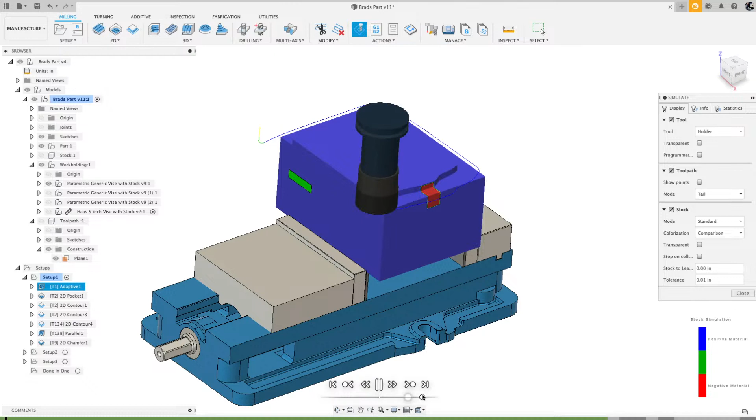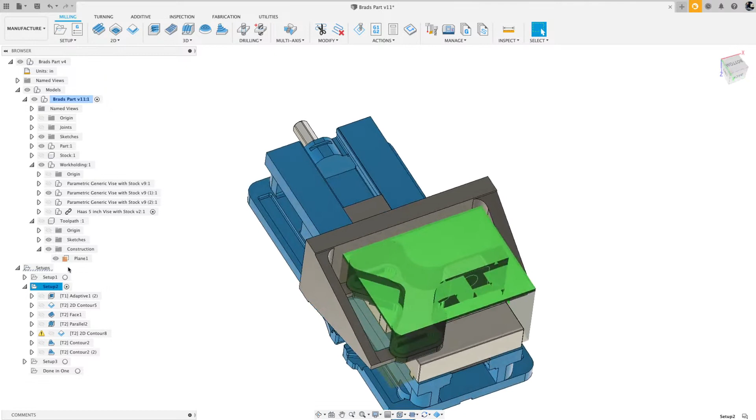Let me just run it. If you guys remember this, actually I should probably just zip right through that. So that was the first operation. And then we flipped it over. That was operation 1. And then operation 2. Let me come here. Let me hide. Whoops. So then operation 2. Let's see. We got this guy here. Okay. So operation 2, we flipped it over. And let me simulate this guy. Something's wrong with my visibility of things, but then we machined it here.

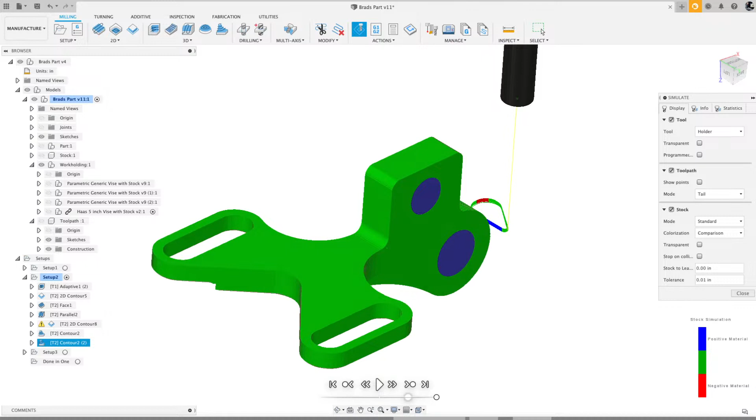Awesome, everybody. Okay, so then we machined this, and then we came to the side, and we put those holes in with a couple of bores. And so that's where we ended up. And so that was 3 operations. And now, let me turn this guy on here. Let me hide that.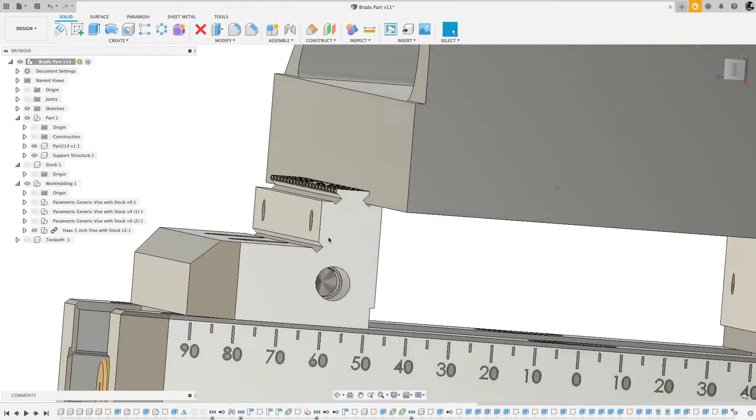I'm holding on just here at the bottom, generally about 3 millimeters or 100 thousandths of an inch. I start with my stock. I have a parametric vise set up here with the stock in it, and if I hide the support structure, you can see the stock I'm intending to use for this part.

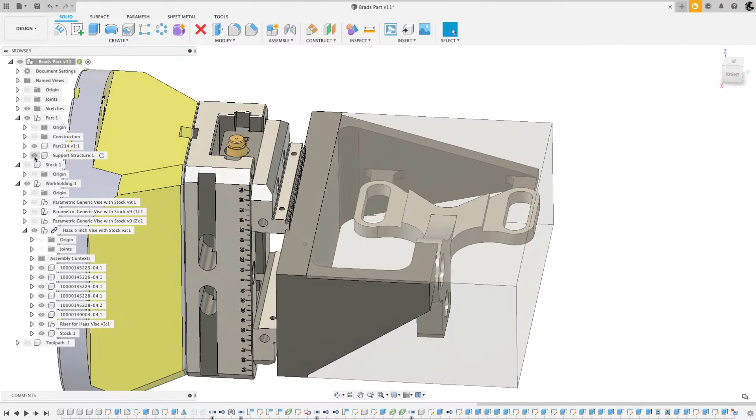If I started to machine this part, I would have to be mindful of how I'm going to hold it. This is merely a suggestion, not the only way to do it. Some of you might think you'd flip it 90 degrees so the part is sticking up this way, but from experience, I just like to do things like this.

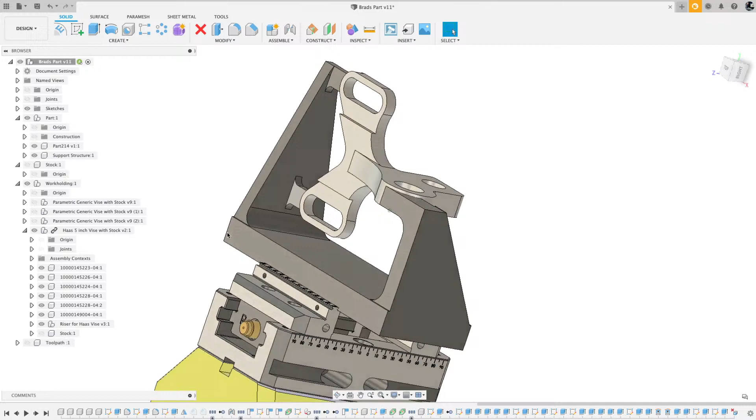It's being supported in 3 points. Let me hide that stock. Because it's supported in 3 areas, and this support here is a little bit offset, the part will have a lot of rigidity. Then what I would do is just start machining this.

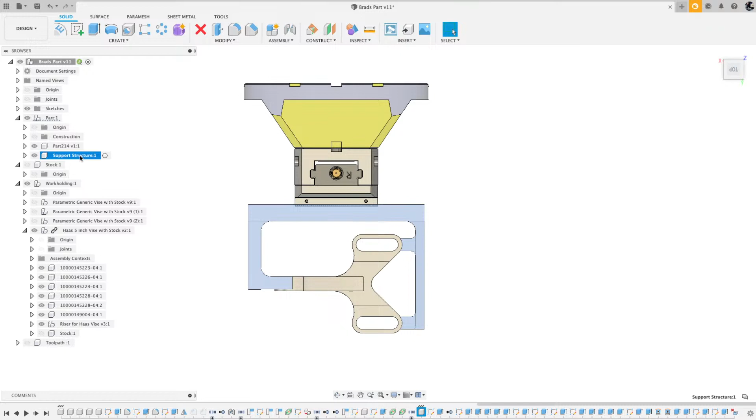I want to talk about some of the things a machinist would need to do. As I'm looking at machining this part, I'm thinking about where my toolpath is going to go and what boundaries, if any, I need to create, like sketches. If I look at it from the top view, rotate it, and imagine it sitting in my machine looking top down, I'm going to want to machine all of this area. I don't want to violate the support structure here, and obviously I don't want to violate the model.

So I will definitely set those up in my setup. But even before I get to that, I need to do a couple of things, and I have a bucket -- I call these buckets -- where I keep some things for my toolpath.

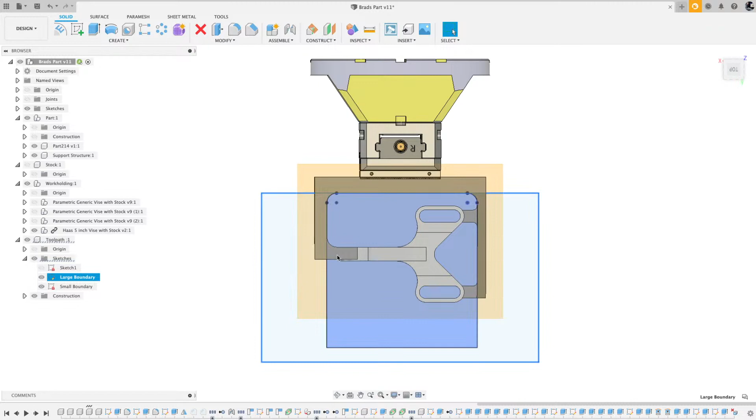I create some sketches, like this large boundary I created, so that when I do my roughing, whether it's adaptive or pocket clearing or something like that, I tell the tool to stay inside that large boundary, the blue area here. It will machine everything within the boundary but will not violate any of the model.

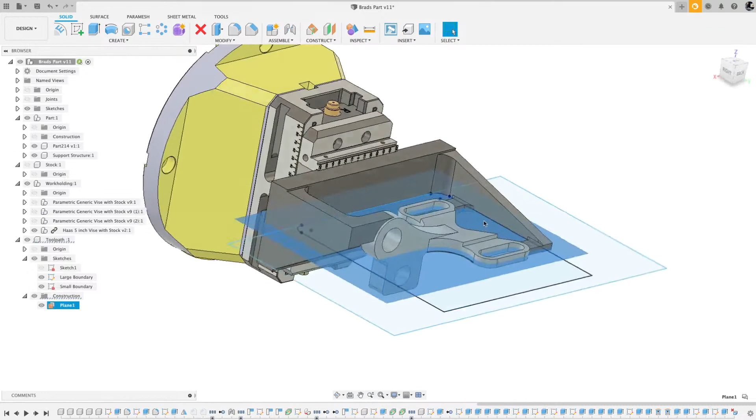The other thing I do is, in that same component, I created this plane. The reason is it's right on the center of rotation, so when I select my heights for my cutting depth, I'll select that plane and tell it to go below that by about 1 millimeter, in metric.

Maybe about 50 thousandths, sometimes even 100 thousandths to 3 millimeters below that. So when I'm machining in this orientation and the tool is coming from top down, if the tool is in line with this axis, the tool will go below that. I could even select it as a Z depth to go down to this face.

Again, I'm just talking through things as a machinist. When I'm doing a project like this, how am I going to hold it? What machine am I going to do it on? What material do I have on the shelf? What's the material of the part? What's the quantity? What's the tolerances? And when is the part needed?

If it's one part and they need it yesterday, I'll grab whatever size material, throw it on the machine like I showed in that example, and start roughing and machining it. If I'm making 100 of these parts, and it'd be impossible to make it same day or next day depending on cycle time, then I'd probably invest some time into building some fixturing.

So I don't have to start with such a large piece of material, because when you start with such a large piece, you have to machine all of that material away. That's cycle time, and it also costs money for a large piece that might be twice as big as necessary. If you're making one part and wasting $20 or $50 on a $500 part, who really cares? But if you're making 100, 500, or 1,000 parts at $20 more per part, you can quickly see the math dictates the direction you want to go.

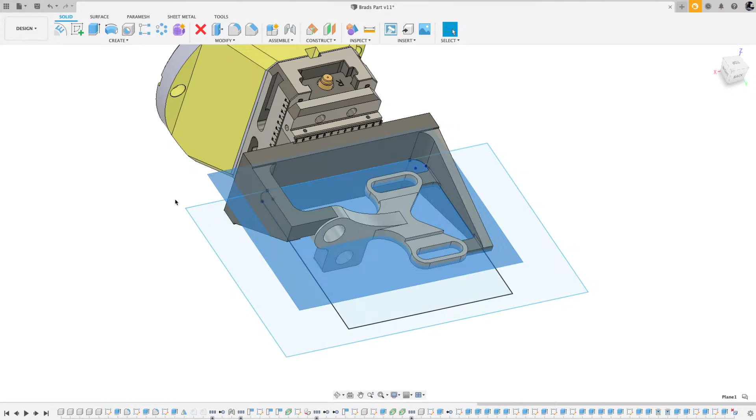Those are the things I focus on as a machinist doing a part like this. But again, I'm thinking this part's needed immediately and it's only one part, so I don't want to build any fixturing. I'll take a block of material that's a little bit larger, and let's turn that stock back on.

And I had that stock as part of my parametric setup. That's why it's in this work holding bucket. Otherwise, I would have it up into here.

But yeah, so those are just some of the things that I talk about.

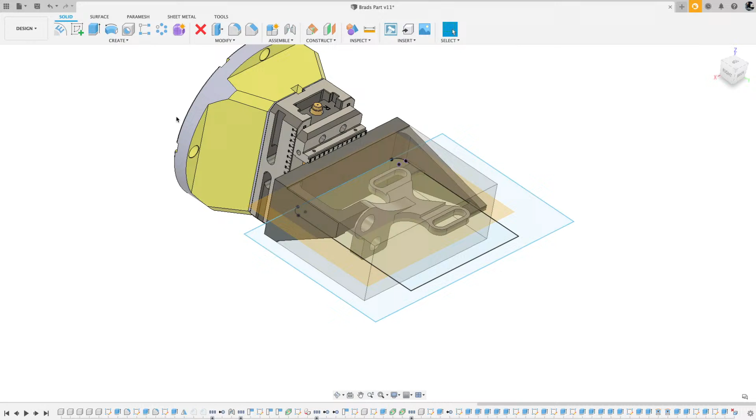Okay, getting back to this part. So now that I've talked through this and I have my stock, I'm just going to hide the toolpath bucket. I don't need that visibility on. And there's my solid model of the stock, and then again, that support structure.

When I machine this and remove all the material, I will have the support structure as part of my model that I'm machining, and also the part. So I don't want to violate the part or the support structure.

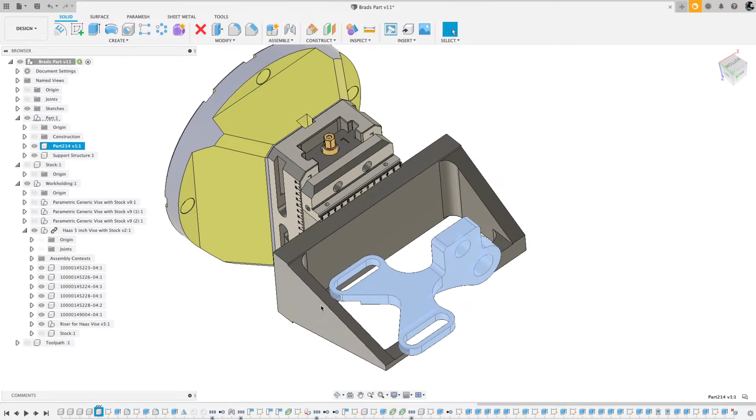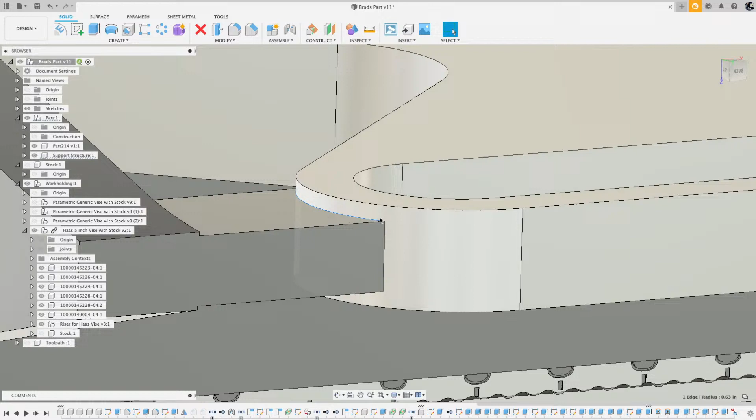And then for the very final operation, what I will do is use a 2D contour. I'm stepping ahead, but I would machine everything, and I would use this edge here and just do a 2D contour along that edge and step down very small. Depending on the structure or size of the part, I'll step down 20 thousandths, maybe 10, sometimes 50, sometimes even 100 thousandths, which is about 3 millimeters or so.

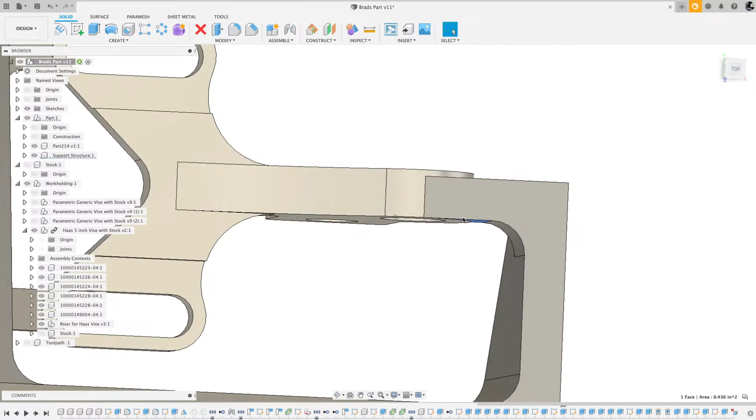And then I would leave a little web of about 10 thousandths of an inch and then break it off. I'd have a really thin tab here, a really thin tab there. And the same thing, I'd be able to rotate it this way and drive my tool on this edge and come down just shy of this face, again leaving maybe about 10 thousandths of material. So when it's done, if I have 10 thousandths of support here and here and here, you'll be surprised at how strong and rigid that is.

But I would definitely machine everything first with these tabs intact. Also, another thing I'm thinking about as I'm talking about this part - if this part was taller and came out further this way, I would leave all of this area solid. Like let's say where this stock is, I'd leave all of this area solid if it was sticking out this way, and do as much machining on the end, and do the finishing of that part as well.

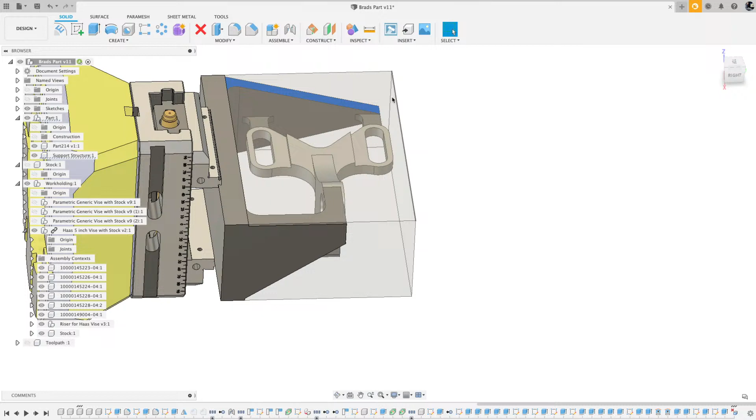No different. Let me grab a pen. No different than if I was doing a lathe part and I'm supporting that part in a chuck, and I've got that part sticking out.

Actually, do I have any finished parts? Here's a part I did. And then you're holding that in a chuck, and the part is sticking out. Depending on how far it's sticking out, you want to finish on the end of the part with as much material in this area solid so that it's rigid when you're machining this, and then you work your way back.

And I remember on that spark plug bottle opener that I did a while back with Brad, Brad did a live stream on the design of it, and then I programmed it, then we machined it at Pier 9 in San Francisco. So same process. So sometimes people look at a part like what I have on the screen and say, oh, that part's sticking way out, it's going to chatter. You'll be surprised how strong and rigid that is.

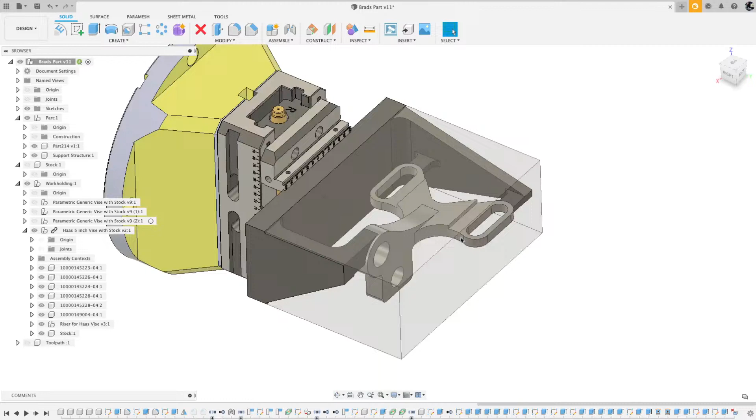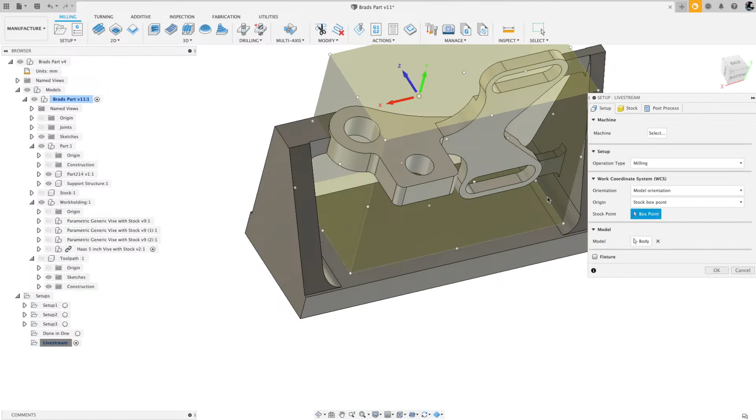So let's switch my screen. So again, those are the things that I think of as a machinist when I'm machining a part like this. So what I would do is I would create my setup, and let's dive into that. Let's go to manufacture. All right. So this setup 5 is what I just created quickly when I wanted to see the stock size. But I can just continue on that. Let me change the name to LiveStream, and I will just talk through some things that I need to set up properly to get this type of operation to work.

Obviously, I need my model. I can select my model here, so if I deselect this, I could select the model right there. If I cancel that out, I could also just grab the part here. So I can navigate into here. I could grab that body. I could deselect it. If I grab this, that will also work depending on what's under this. So be mindful of that. You can also create components.

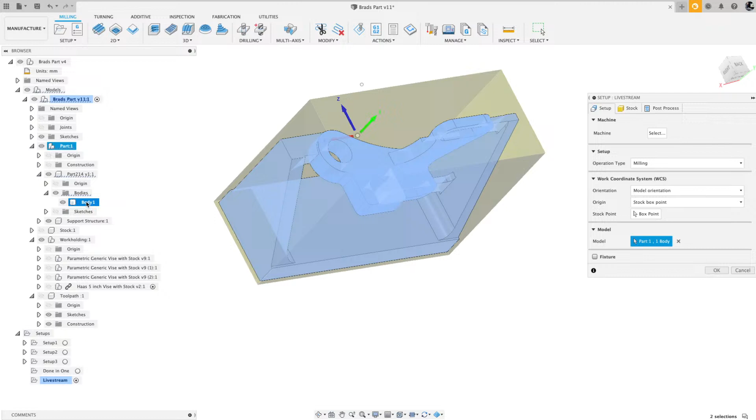So let's say, what if I grab this whole component? So it will grab everything that's under this component, which is the part that Brad created. It was part 214, and it's that body. It's kind of hard to tell, but it's that. And then also the support structure. So be mindful of when you're creating your components and bringing things in, how you set it up. It can make your life a whole lot easier. So again, if I deselect it, I can just come right here, and that's the part that I'm machining.

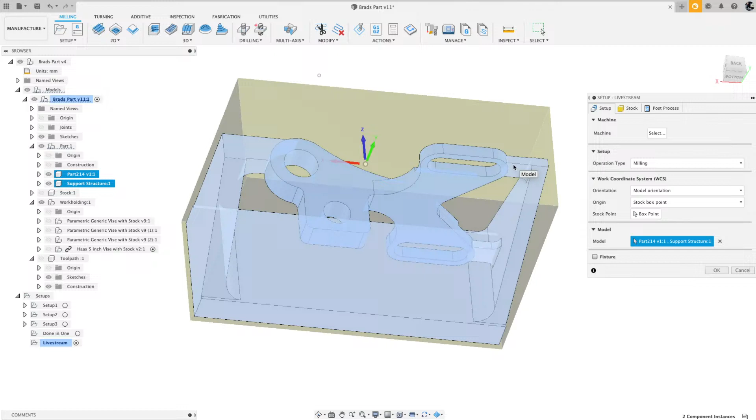The other thing you could do is, if you have these separated, let's collapse that so it's not as busy. If you're doing some 3D strategies, and let's say I wanted to cut those tabs, and if I had this support structure as part of the setup, and I was doing a 3D strategy, it would think that the tool is violating that model. So just be mindful of that when you're creating your setup. I can leave it like this here for now.

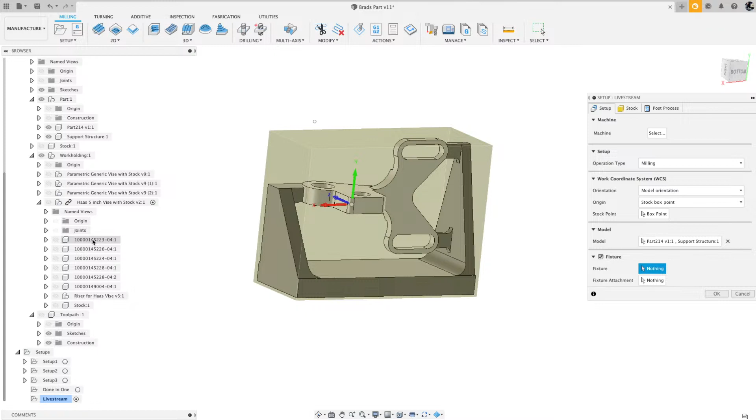I could also assign the fixture that I'm going to do. And I remember that's going to be here. And I should probably do a little more homework, maybe combine all of these. But I've got a riser, the Haas riser for that 5-inch vise. And then these are all the parts that make up that. The reason why I'm not selecting the whole component is because I have that parametric stock in there. And if it picks that stock, it won't machine it because it's going to think that that stock is part of the model that I'm machining. And we don't want to violate that.

Or it would think, did I say that right? Anyway, you guys know what I mean. All right, so coming back.

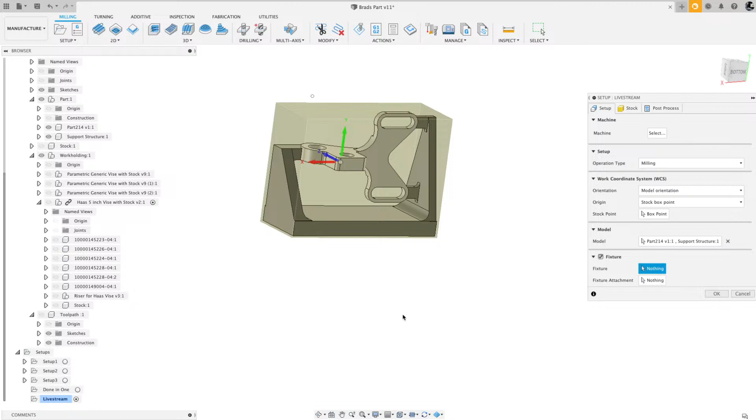On my fixture, I'm going to grab these guys here. I'm not going to worry about fixture attachment because that's already selected. Now, under stock, instead of relative size box, I can grab the stock from a solid, and I know that I created that stock already here. So now, the stock that I'm machining is coming from that solid. And that solid came from here. I suppose I could show you what I did there. Let me bounce over to that really quick.

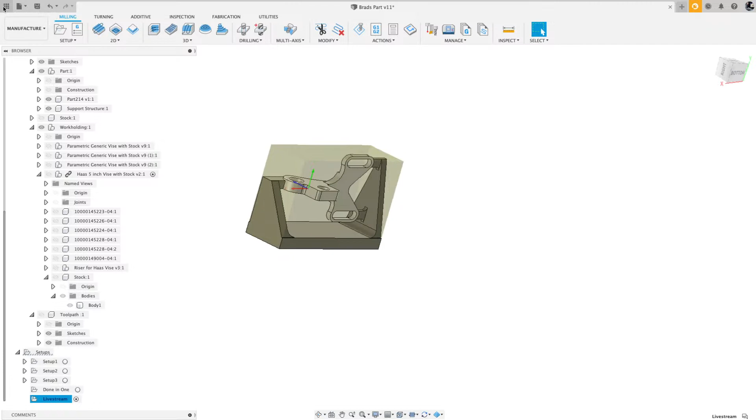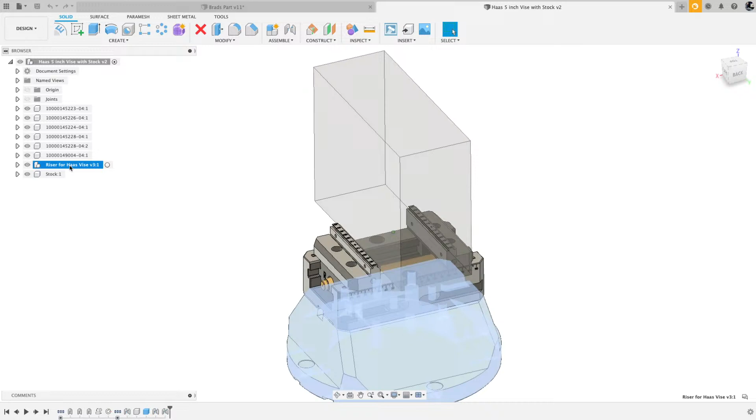Come to LiveStream 13. What I did is I created this. Let me open it. Give that a second to open up. And in this, here's all the parts that make this guy up. That's straight from the Haas website. I downloaded their model, and I just made this assembly. And I also created the stock. And that's just a body. I used a primitive box.

And what I also did is, I'm a machinist, I like to be a nerd. And maybe I'll share this with you guys in the comments when the live stream is done. I created some user parameters to change the dimensions in X, Y, and Z of this stock. So pay attention to the size of this stock.

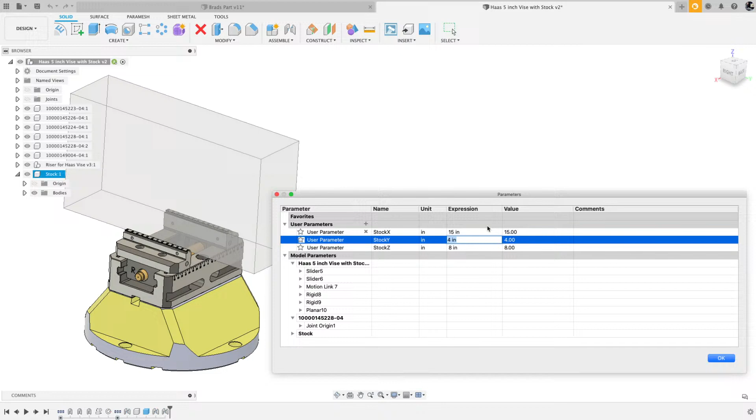So currently that stock X is 10.5 inches. What if I make that 15 inches and I hit tab? It changes the size of that. Let me move this out of the way a little bit here. Can I make this window smaller? Let's do that. And now my Y dimension, that's this guy, 4 inches. What if that's 2 inches? And I hit tab. It updates and the jaws are moving.

And then the stock Z, that's going to be the height in Z. What if this is 2 inches? Now we've got my stock there. Again, I can just come back here and let's make that 5 inches. And you can see how valuable and how powerful this is once you do this upfront work and create these joints and motion links and things like that. I'll go ahead and I'll share this with you guys.

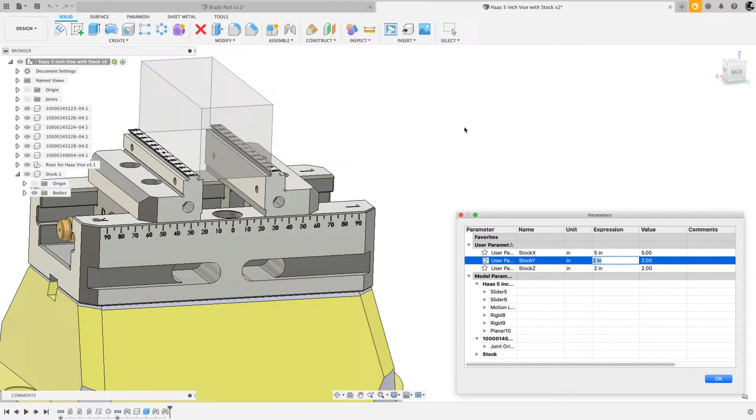All right, Monda, fellow nerd here. Marko wants me to start doing live streams in Croatian. Awesome. Hey, that's a good idea. Maybe Marko can join me. That'd be cool.

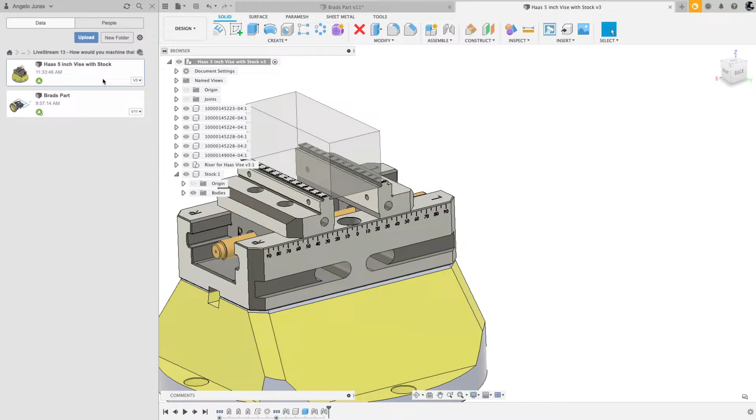So what I'll do is if you have something in Fusion, you could right mouse click and say share public link. I'm not a fan of that word because if you're working on a private design, you don't want that to go out to everybody. I would just prefer that says share document or something like that. But so what you do, you click on this. Did I not click it? Share public link. There it is. This dialog box pops up. And then what you do, you come here to say share the latest version with anyone using.

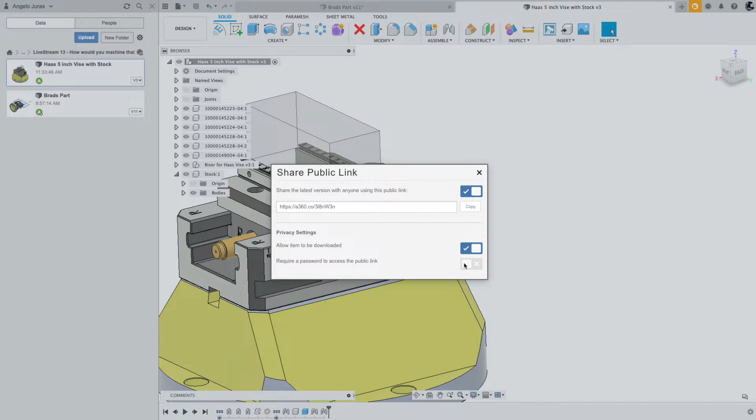And it creates this URL here. Also be mindful of this. Allow item to be downloaded. Turn that on. And you could also put in a password here. I don't care about this being password protected. So I'm just going to copy this guy. And I'm going to drop it into the chat. Let's see. Does that work? It looks like it did work.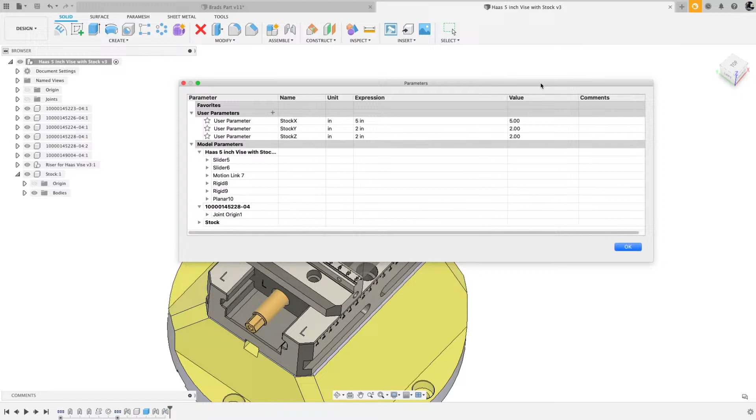And again, to get to those user parameters where you change the size, you simply make sure you're in the design workspace, come to modify, and go to change parameters. And then this box pops up. And you can create your own user parameters. So this, sometimes collapsed like that, right? So you go to user parameters, you can create a new one.

And you can say, let's say I want to put a chamfer or some hole feature in there. I can say chamfer size. And then you put a size here, like say 0.25, a quarter of an inch. And you can put a comment. So then I have that here. And then if I wanted to do, not that I would really do this, but if I had a chamfer there, I can come into here and say chamfer size.

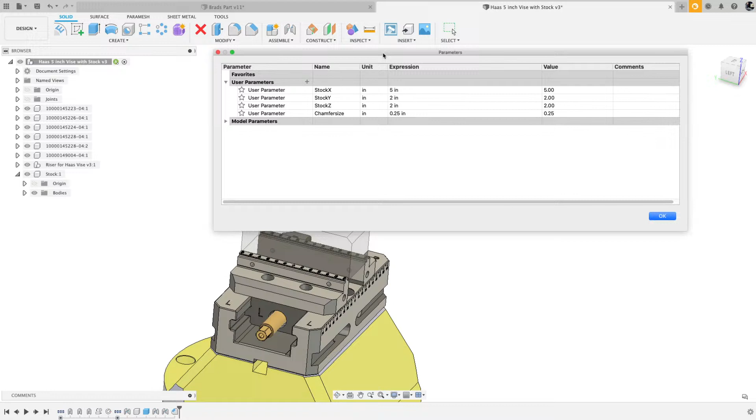Not that you would do that, but to see the power of this, again, you could really nerd out. I can make this 1 inch. See how that chamfer updated? Super powerful, super cool. I use it all the time. You can use it for your jaw width. I've done it before, the size of my parallels. I believe I shared that in a previous live stream. So take a look at that. If not, just leave a comment and we'll get that to you. Okay?

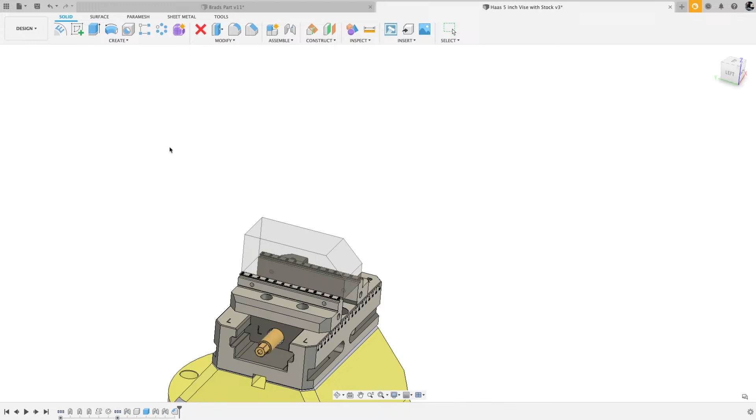All right. So let me close this without a save. I don't want that chamfer to be in there. Okay. Because I've done some work and this vise is linked to, so this is the document I'm currently in, Brad's part. I'm currently there. But I dropped this into this assembly, so that's why I'm getting that yellow update. It says a component is out of date. If I click this,

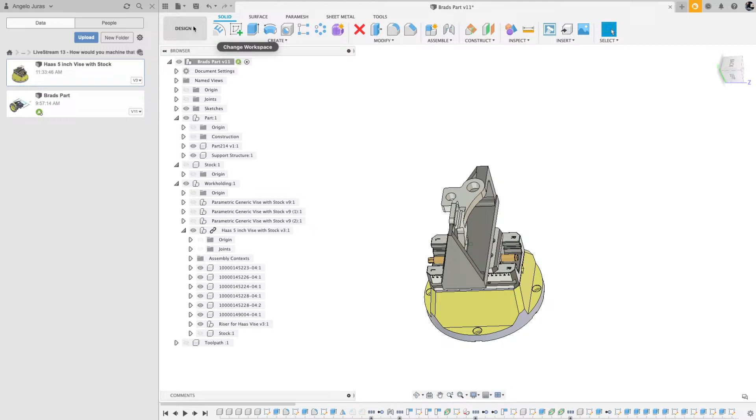it'll update it. And typically what I'll do is I'll go to design, and then I'll update it here. And I broke something. No, it's good. There it goes. Yeah, so make sure you're in design when you do that. All right. Coming back to manufacturing workspace.

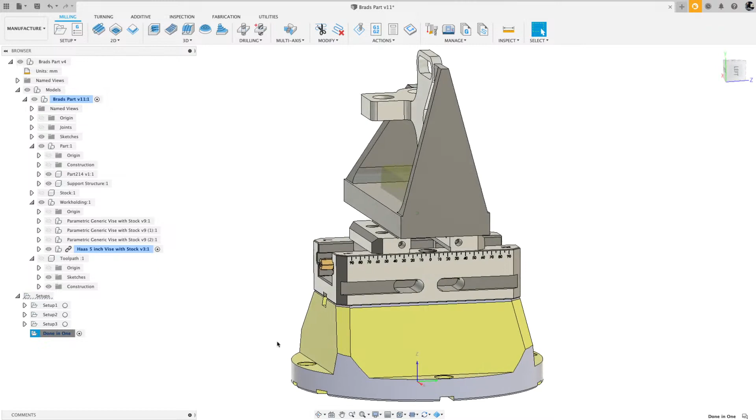Oh, and look what happened. Because I updated that vise and the stock, look at the stock. The stock is really small because it was linked. What I should have done is broken the link first, and to break that link, you could right mouse click. Oh, got it, sorry. Gotta be in design. Come over here and you say break link. What that does is it'll break the link between this document that's called Brad's part, and the source of this assembly.

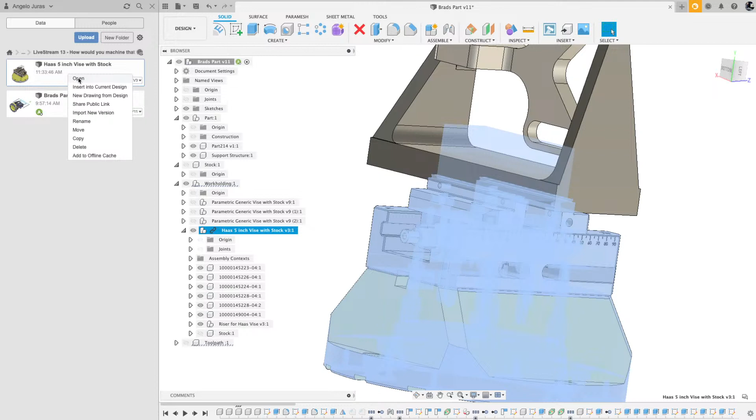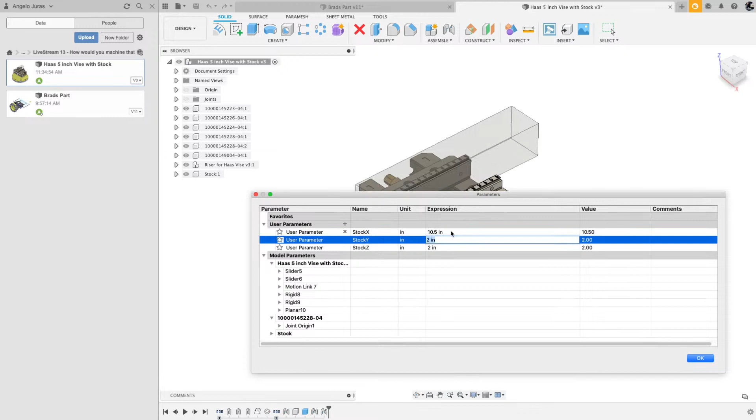So because it's still linked, I'm just going to come into here. I'm going to open this. I suppose I could use edit in place. They call it EIP. But I am a machinist, and I'm kind of stubborn, and I like to do things my way. Let me bring this guy here. And I remember that was 10.5 by, I think it was 8 by 4. Oh no, it was the other way around. It was 4 in Y and then 8 in Z. There we go.

Now I can save this. You can also leave a comment here if you want to, but I can say updated stock size. And then here, when you look at this, you can see the note updated stock size. Super useful when you do revisions. Pro tip there for you guys.

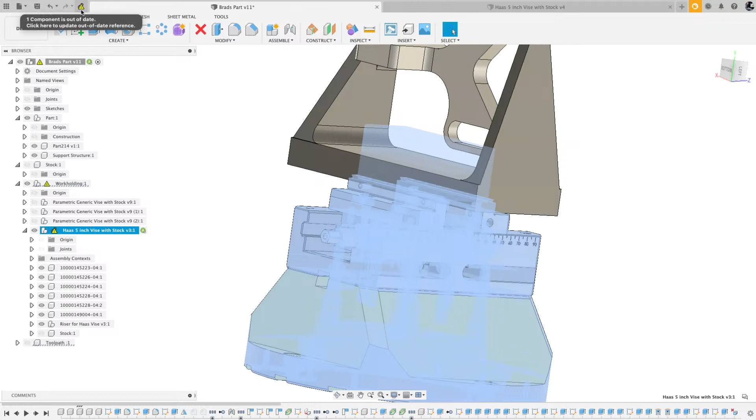So now I'll come back to this. Brad's part. I'm in design. I can update it. Fusion's going to do its magic. And now if I look at my stock and the jaws, they have updated. So super useful. Be mindful of that. When you make a change in the source, it will carry over to wherever it's being used.

Brad, thank you for handling questions. I don't see anything coming as far as questions. So time is going quickly.

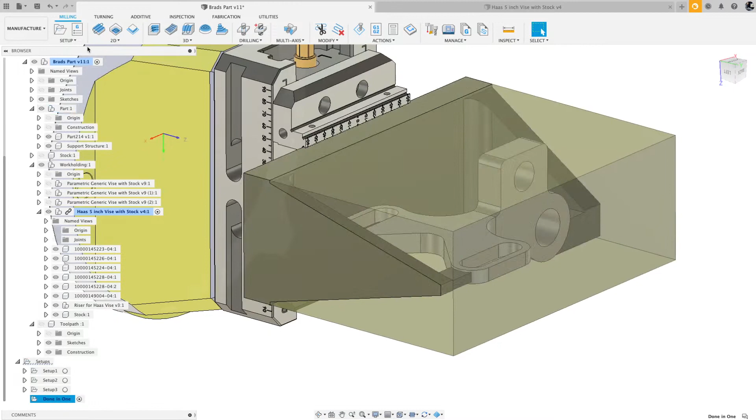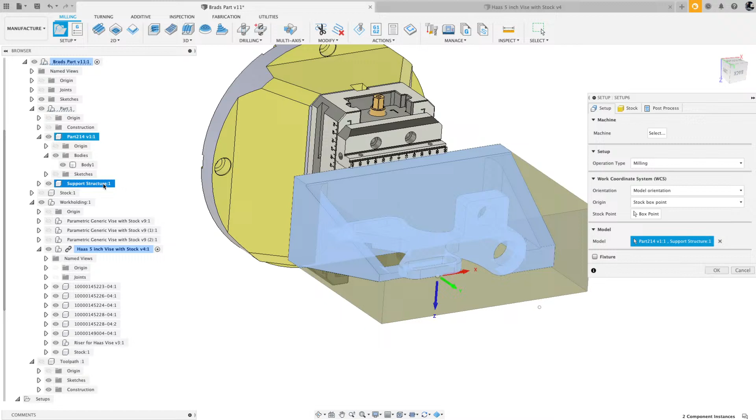Let's go back to the setup in manufacturing. I'm just going to do a fresh setup, start from scratch. So we'll do a new setup. And the very first thing I'm going to look at is what am I going to machine? I want to machine, if I come to this part, remember this, I want to machine that part, and I also want to machine the support structure. The fixture, what's my fixture? I could just start grabbing things here if I wanted to. I could also grab them from this area here.

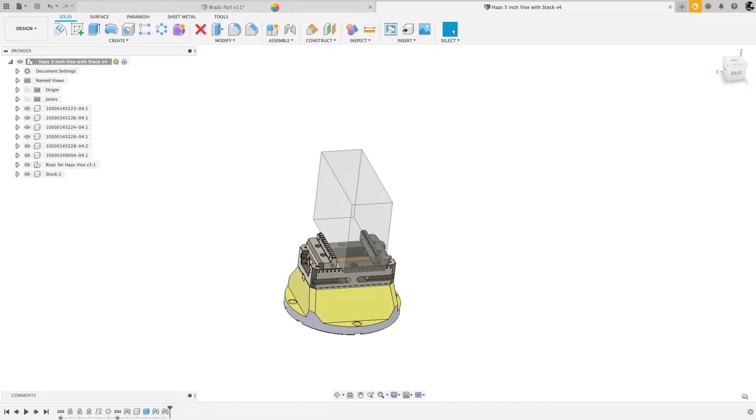All right. And then on the stock, instead of from preceding setup, I can say I want to get that stock from here, which was that stock that we had defined in this. Remember over here? That stock right there. That's this guy. Come over to this tab. And because I exited, I hit this tab, I lost my work. So be mindful of that when you're jumping in between. Make sure to hit OK on your setup. So let's go back here, do this one more time.

This is not scripted, guys. I'm just going off the cuff here. So whoops, I'm not doing that.

So where's my part and my support structure? I'm machining. My fixture is going to be the riser, and then all these parts that are part of that vise. Again, I need to just combine those into one. My stock is going to be from a solid, and I'm going to pick this guy here. Again, normally I would have a separate bucket that contains my stock. Where did I put that? This guy. But I'm not using it today.

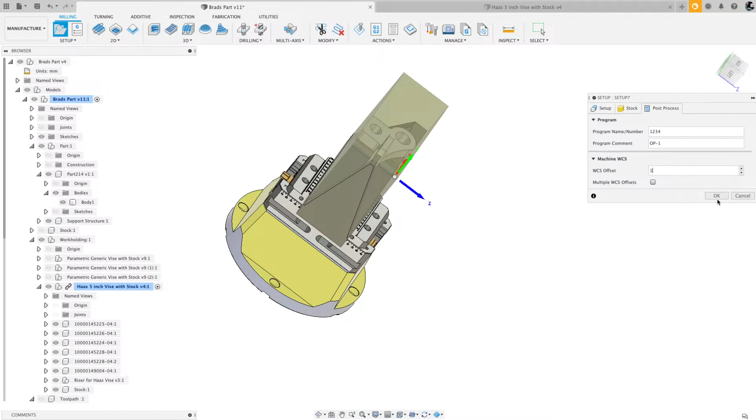And then now that I got my stock set up, you can come in and post process. Give it a program number, 1234. And program comment. You can call it whatever you want. Op 1, done in one, whatever you want. WCS offset, I like to get in the habit of giving it a number 1. That will give you a G54 if you're on most machines. Now instead of hitting something else, I'm going to make sure to hit OK. So we maintain that.

You know what? As I hit OK, I realize I completely missed my work coordinate system. I'm going to select my Z and X. So that's going to be my Z normal. And then my X normal, I'm going to grab this face.

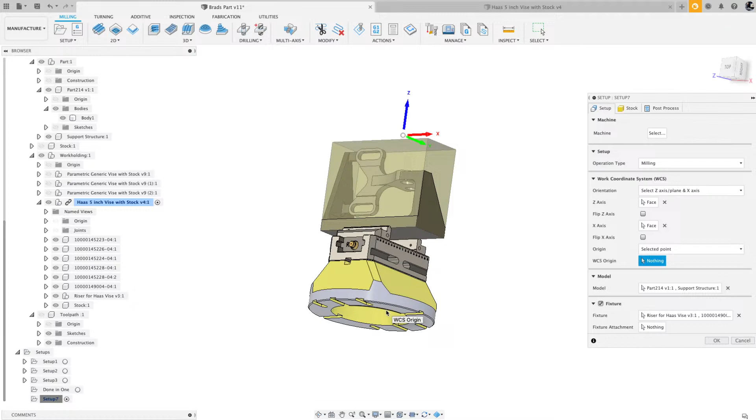Where's my origin, my 0 point? Depending on who you ask, you'll get a different answer. Some people like to do it at the top center of the stock. I like to pick a fixed location. So I can pick, let's grab this arc here. I can grab this arc there.

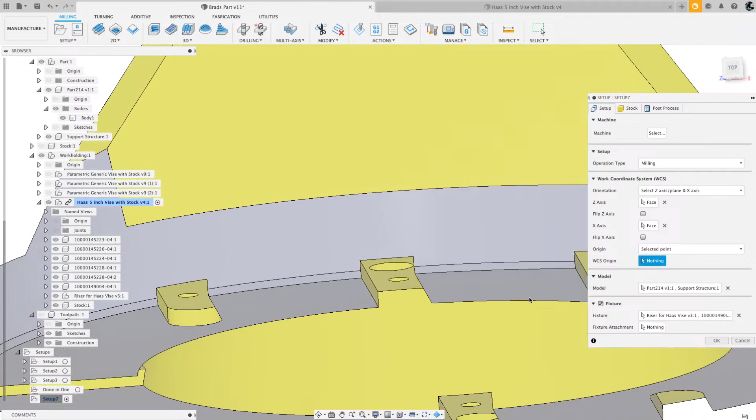Make sure you don't grab this one, because then the Z, if you're looking at it from here, the 0 wouldn't be on the table surface. It'd be actually up where that chamfered edge is. So be mindful of that. So with this highlighted, I'm going to grab this. So that'll be the top center of my table.

I might even do it from the top center of this riser. Again, it depends on what you're doing and who you ask. So there's my orientation of my WCS. I've got my stock and I've given my information here. Hit OK, and with that we are ready to create some toolpath. So let me hide this visibility here manually there.

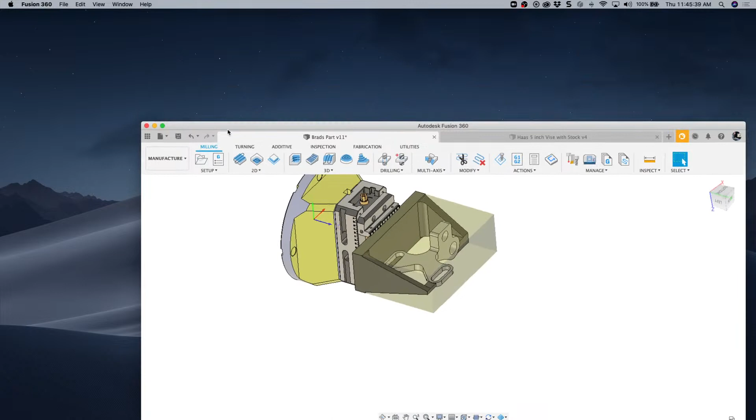There's another thing let me point out, guys. Again, just Angelo Machinist Nerd here.

Down here in the bottom, I have 3 monitors on my desk, on my computer here, and this doesn't always work the best for me. When I click on this, the little flyout will open up on my screen below, but because there's a gap, I can't click anything. So look, if I maximize my screen, well, it's there now because I had it highlighted. But if I click on this drop down, I can't see it. It's bleeding off into space on another screen.

So what I have to do, I have to come up here, and then I can come here, and now I can check these on or off. So I like turning this on because what this setting does, let's maximize my screen again. What that does, let's collapse some of this here. Depending on what setup you have and what's selected, the visibility will update.

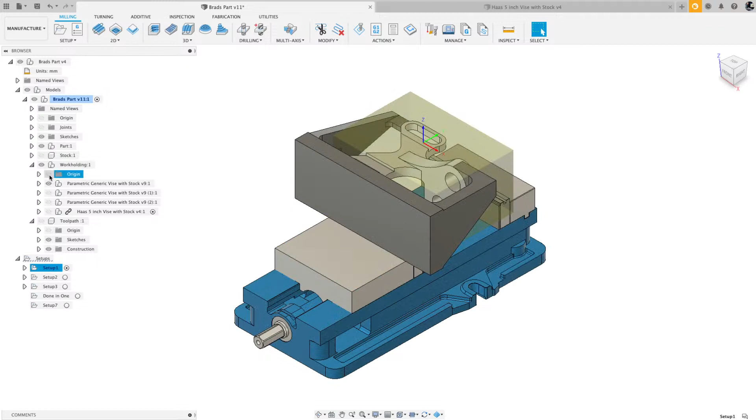Now I have this guy turned on. So as we're toggling through, I must have a selection that's not right because that support structure should not be there. But what it does, it will show the proper visibility based on what you have selected. So you don't have to go through and dig in and make sure you turn on sketches and all of that. Super powerful, super helpful.

I know that some people will be watching and saying, oh, you missed something you clicked. And it's possible. I'm a human and I make mistakes from time to time. So all good. And then what I would do is give this a name. Let's call this LiveStream Setup. And then I would start creating my toolpath.

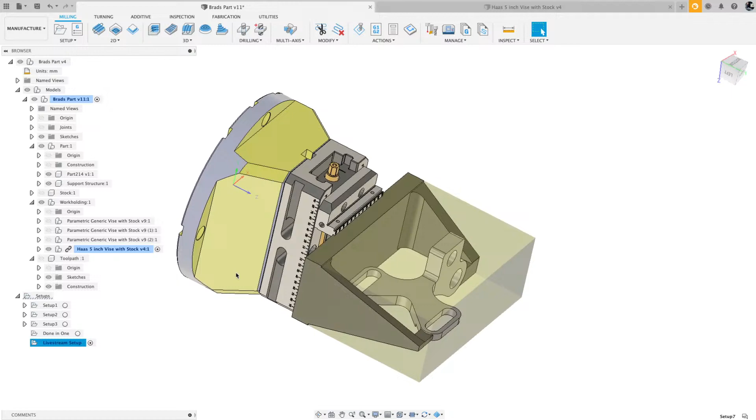And because we're quickly running out of time, and I knew this would be a 2-part, I'm not going to get into that. I'm going to focus on the toolpath on the next live stream for part 2. But I would probably come in this orientation, and actually it depends on who you ask. I could come in this orientation and rough everything from this surface up to get rid of that material up there.

And then I would use another adaptive and tilt it sideways like this and machine everything I can from that tool vector and machine this cavity, machine all of this out of there, and then flip it over, do tool orientation and hit it from this side. And when I'm doing things like that, remember how I talked about I would create a plane.

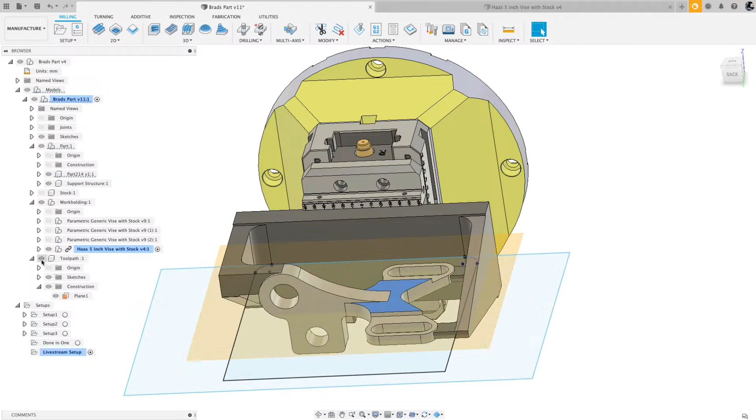So let me turn this on. So I would use this plane. I don't need those sketches. I would use that plane as my Z depth. So that plane is here.

So I can use that plane, and when I create a toolpath from this side, and I say this is my Z depth, and I go below that by a certain amount, and then if I just copy paste that operation, all I would have to do is use the same toolpath. If I copy paste it, it would maintain the boundaries, and I'm going to show this on part 2.

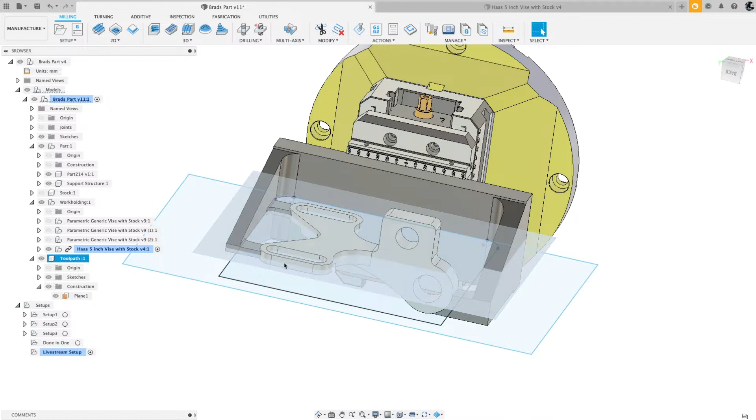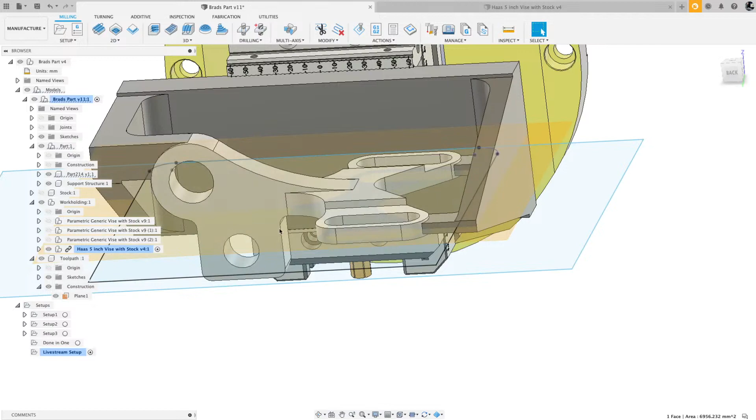It'll keep that boundary and that plane, but all I would do is flip the vector, flip the tool orientation, and it would then go to the same depth, but from this side. So always think ahead when you're doing things like that, because if I was here and I did this side and I said my Z depth, and again, guys, I'm going to cover this on the next one. If I said that's my Z depth and my tool is coming from this side here, and I'm machining all this away, and it goes a little bit below that.

Now if I copy and paste that to do the other side, well, now that's the Z depth, and then I have to go ahead and select maybe this as the new depth. So always be mindful, think ahead as for your selection, so when you flip the vector or the orientation of your tool, you can save yourself a few steps, because that rectangular boundary would remain the same instead of the tool coming from this side.

If I use this, instead of the tool coming from this side, and let's say I had the plane there, and I said that was my Z depth, from say 5 millimeters below that plane, that was at the center of rotation, and when I flip it, if I do a copy paste, I can maintain that same boundary, use that same surface. I don't have to do any manual selection. All I have to do is change the tool orientation from this side to this side and hit regen or generate. So those are some of the things that I do as a machinist to make a job like this easier.

Let me take a look at if Brad dropped any questions. No, we're all good. Coming up on time. As I said, this is a privilege for me as a machinist. I've been a machinist for a while, that I get to share some of the things that are in my head, some of the things that I think about as a machinist, to give you guys some ideas. And like I said on this part, this is not the only way to machine this part. This is merely a suggestion. Let me hide all those guys.

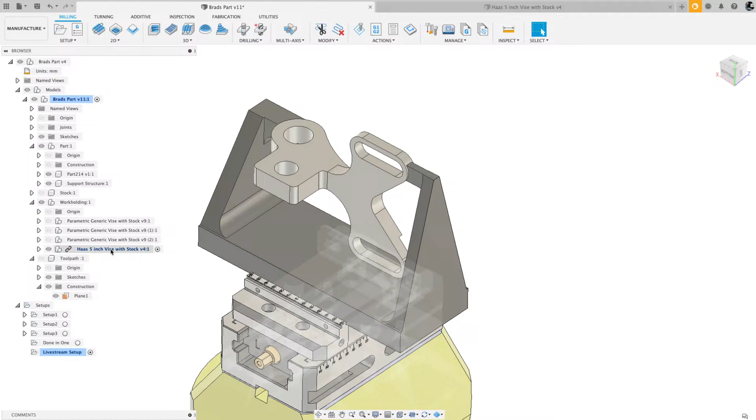So I'm going to, with that, leave you guys to digest this and think about the manufacturing or machining process for this. And I do see a question from Marco regarding Rimats. Yes, I know Rimats. Mate came to visit San Francisco Pier 9 over a year ago or so. Peter says, Brad is a CAM master. Angelo is now too. Yeah, I want to be mindful of your time, guys, and not go over too much. And we can just come back another time and finish up and carry on the conversation.

That's all I have for today. We'll come back and do this a part 2 and show you how to machine that with the proper tool paths or suggested tool paths. My suggestion, if you ask some of my colleagues or buddies or friends, they might have a different workflow. Again, the suggestion on the screen, that's only my recommended way. There's many ways to approach that part and get the same result at the end.

It's just a matter of, like I said, the quantity, the material, the cost of the material, cycle time, when do you need the part, tolerances, all those things you need to consider as a machinist to make sure that you make the most of the time you have available and get the engineer the part as quickly as possible, on time, within spec, and also a good looking part too. I've said it before, anybody can make a part, but not everybody can make a beautiful part. Kind of like a chef. You can take the same recipe and put 10 people on that recipe, and the food will taste slightly different. And the better chef will always make the better meal. So very similar in machining.